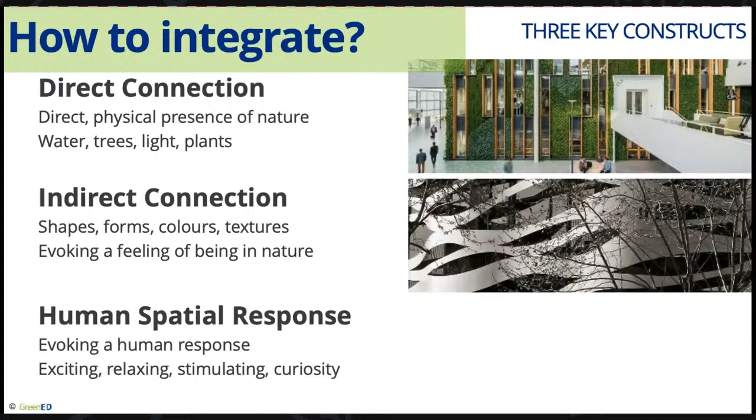And the third is human spatial response - creating spaces that evoke a human response or emotion, something that's exciting or relaxing, stimulating, or makes you curious. That's also done through the built environment and what you're designing and how you experience a space.

So some of the pioneers in biophilic design include Stephen Kellert, who was a professor of social ecology at Yale University, whose research and writings advanced the understanding of this connection between humans and the natural world, and he helped pioneer the concept of biophilic design, an emerging field that promotes health and well-being by creating connections in the built environment. The other being William Browning, who's with Terrapin Bright Green, who's been doing this work for a couple of decades as well. The good news is there are lists you can use to get here.

For Stephen Kellert's work, he breaks it down into 6 biophilic design elements, and within those elements there are further attributes with explanations for all of these - everything from facades and views and animals and plants and nature to biomorphy and biomimicry. There's a whole manifest here, it's very interesting.

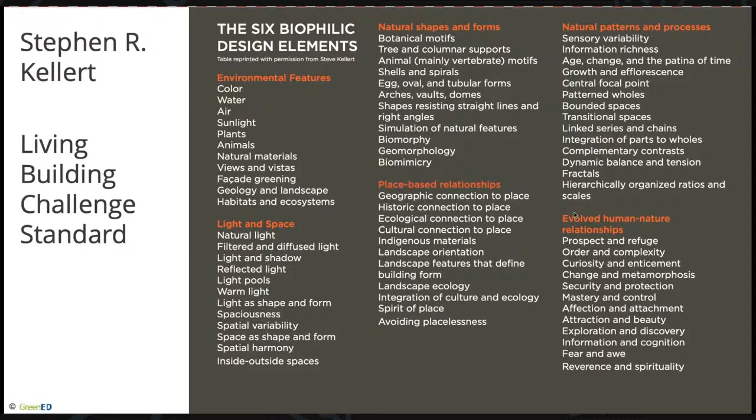And from Terrapin Bright Green, they've also broken it down into 14 patterns of biophilic design, and you can read more about these. We're also going to have a course coming up that's a more deep dive on biophilic design, so keep on our mailing list and we'll let you know.

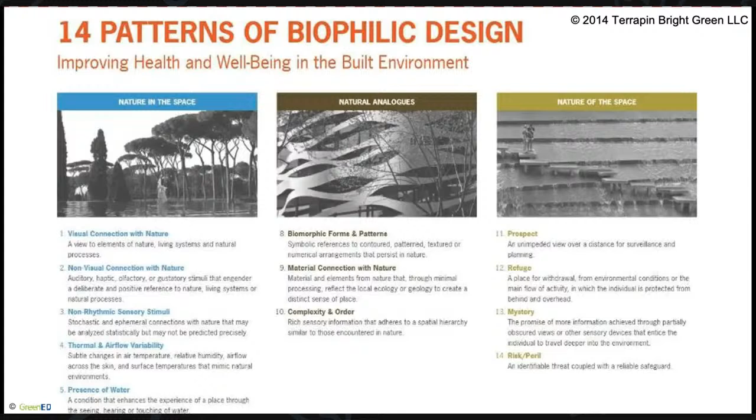So how can this be useful? If you're doing Green Building Rating tools, these 2 tools, the Living Building Challenge and the Well Building Institute, have prerequisites or preconditions, meaning you have to do it - biophilia is one of the components you have to do to get this rating.

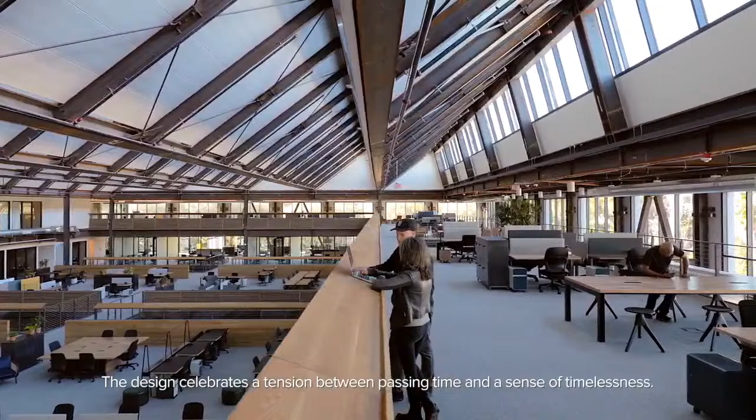Google, as an engineering culture—what we found over time, interviewing different Googlers and working with them, is they're really interested in how things are made and how things come together. So the notion of exposing and expressing not just the steel structure, but really all of the systems, became a key design criterion that fits their culture.

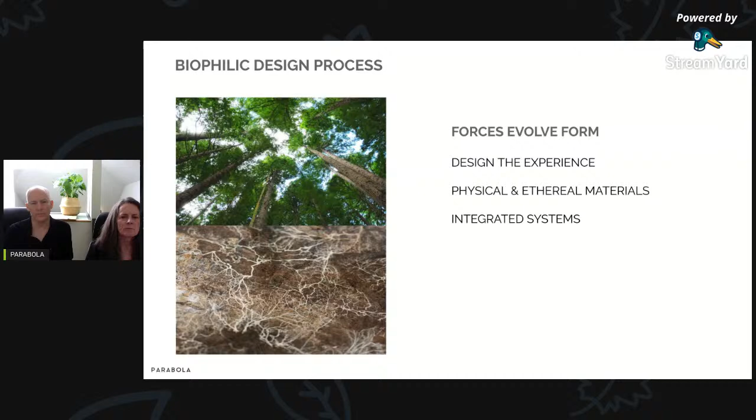That can be unpacked as designing the experience, the physical and ethereal materials included, and integrating systems. When we say design the experience, our goal is to do that as an initial choreography, and then the architecture is what gets designed to support it. That could be seen as in contrast to making a form and then placing people within it.

In unpacking the physical and ethereal materials, it's important that architecture is often seen as a physical artifact, but the ethereal materials like light, air, noise and smell, other sensorial realms, are actual materials that can be designed with. That extends into systems, and the architecture is also not drawing any lines between itself and the systems that are serving it.

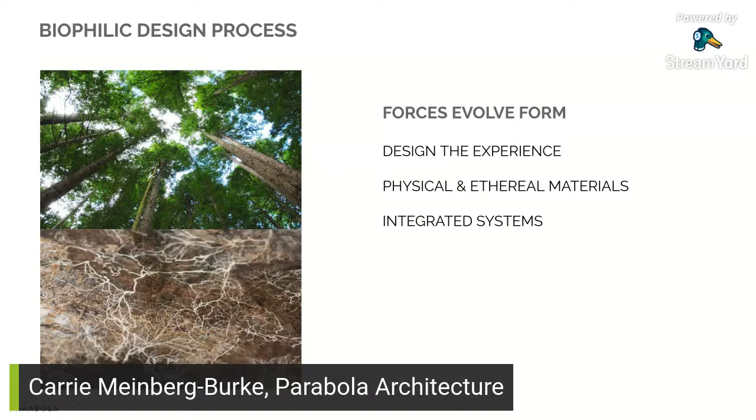We apply that kind of thinking, for example, in the design process to balancing performance and value, looking at when you reach that point where you've really optimized it before you start having loss in one area or another.

When Google came to us, one of the things they asked for was beauty and simplicity. And as we all know, simplicity is not so simple. The effort it takes in architecture, the kind of investment in the design process needed to simplify the built artifact, is something we continually strive to hone.

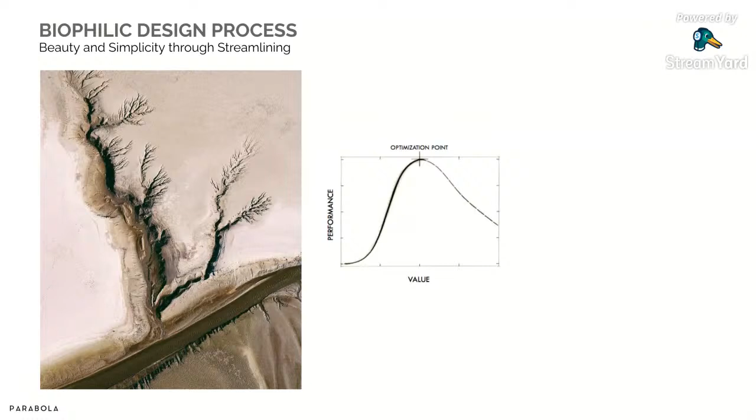As Carrie mentioned, this was a really aggressive schedule. It was 22 months from our very first sketch and very first meetings with Google to first day of business.

In the earliest days of the design, we had a chance to meet with the vice president of real estate, David Radcliffe at Google. We really wanted to understand at the most basic level what he wanted the building to do. He said, we want to solve for the things that we need to solve for in all of our buildings. We need to promote Googler focus by addressing light, air, and noise.

That really became the mantra for the project. They didn't say they wanted a biophilic building, didn't say they wanted LEED Platinum or to win awards. They were really keenly focused on this Googler well-being, but also these ephemeral things, the light, air, acoustics of the building, because those are the things that, if not working properly, cause the greatest level of distraction and complaints, and really inhibit the ability of Googlers to focus.

In terms of a biophilic design process or any integrated design process, we found it really helps to have a simple set of clear directives that you can share with the owner for a clear understanding, and bringing a builder on board and all of the trades over time, if they understand the clear objectives and where the focus is, that understanding really starts to get infused in the making of the building.

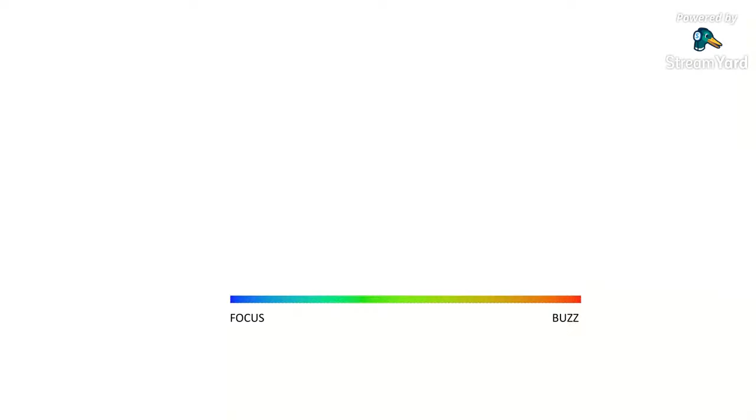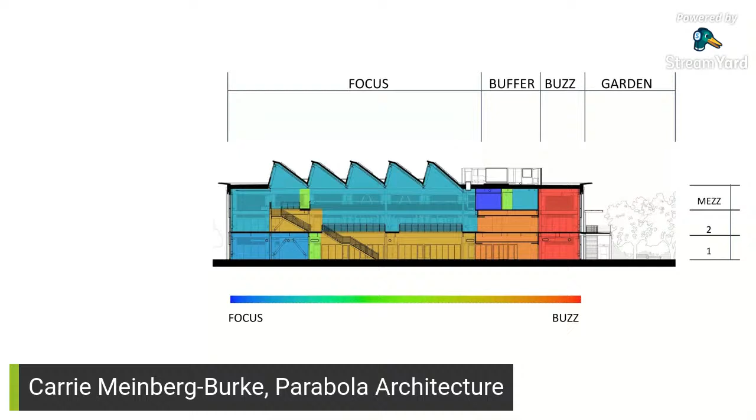When we designed the building in section, you'll see that to the south, to the right on this drawing, we put the buzz zone next to the garden. That's the area with programs like cafes and lounges where people can convene and flow through. The buffer zone has meeting spaces, bathrooms, other service spaces, and small phone rooms. That area also has a mezzanine that wraps around the building, and part of this creates a range of ceiling heights.

One of the things in biophilic design, with Prospect and Refuge, is considering sight lines, ceiling heights, and slots of space that create the perception of variety and right-sized ceiling heights for various program elements. That's very much part of the engine room of this building.

So the spectrum became a really useful tool to communicate to Google and to the potential users, but also to the trades and builders, about the nature of this building. It describes, in that colored spectrum, in some ways the daylight.

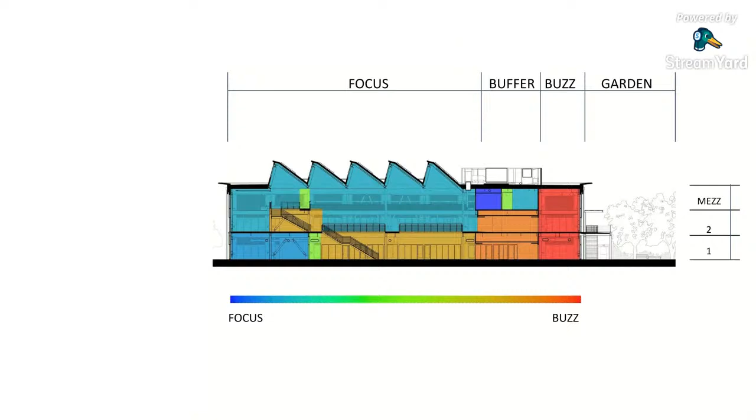To the south side in the buzz space, it's the warmer light qualities where we could allow direct beam penetration to come in, versus the cooler light to the north side in the large workspace, the focus zone, where we worked hard to eliminate direct beam.

But it could also describe a type of acoustic difference between the spaces. The buzzy space, the red portion, being buzzier, and the blue representing something akin to a library reading room, where the acoustic throttles down and becomes more absorptive. So the spectrum became both a diagnostic and a design tool, and you can see how it's represented in the plans.

One of the things in working closely with the builder, as we looked at cost issues, John Castagnoli kept reinforcing simplicity in the plan, not having a lot of different bump-outs in the plan shape.

So we really wanted a simple plan with all the complexity in the section. Often in our experience, buildings that have a lot of form drivers in the plan may not even be perceived in reality. We learned the same economic lesson on our own home, which had a very disciplined, simple plan volume that didn't necessarily relate to complexity or richness of experience.

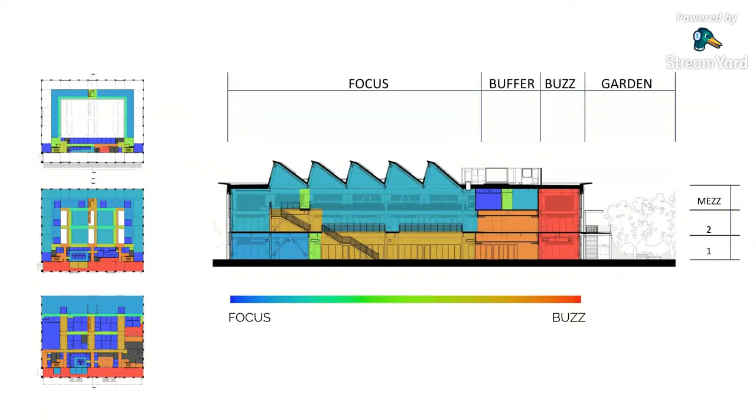That's partly why we design so much in section, because that's the perceivable aspect of design, and it's possible to infuse qualities in section that belie the simplicity of the plan. Plus, Google has a rhythm with a lot of meetings and video conferencing where they don't need a lot of light, so that's placed on the lower level below the focus space. We're taking advantage of the transitions from buzz to focus running south to north, but also vertically through the levels, with light levels and qualities needed as you move up through the building.

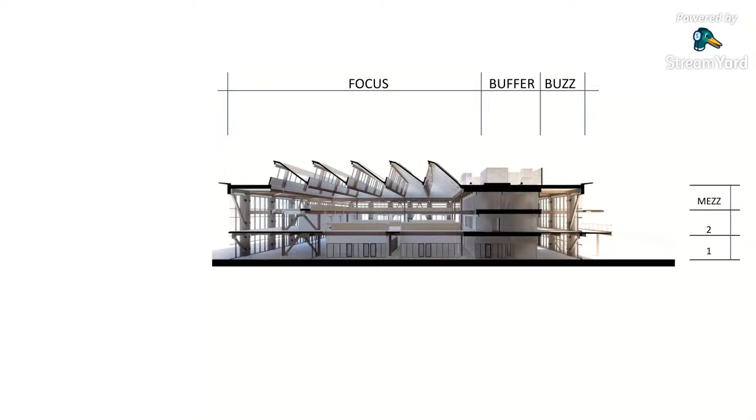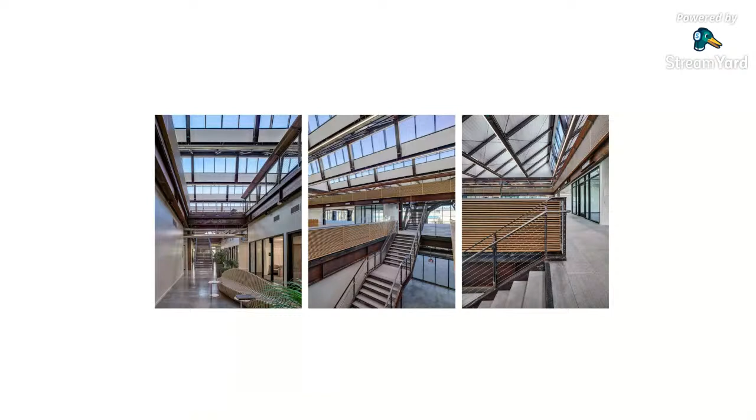There's also this idea at Google of wanting these casual collisions. The open stair and these light wells created that ability, but we also needed to solve for privacy and focus. Those acoustical railings with slats have two inches of acoustical cotton behind them. Those book ledges actually serve as both an acoustical block and a functional ledge and a privacy divider.

One of the characteristics of biophilic design, which we translated into that notion of designing the experience, is shown on the left: coming through the buffer zone from the cafe into one of these light wells, there's a moment where everybody stops, looking up to the north to the large space above, and there's just a sort of wow moment there. It ties into that innate feeling of awe that people have, and begins the sort of qualities of prospect and refuge.

There's the sense of being able to be within the lower level of an office building, but to have a view extending out to see the sky, to see clouds, to see the north light. And then making your way up, moving through this internal stair and arrival into the focus zone.

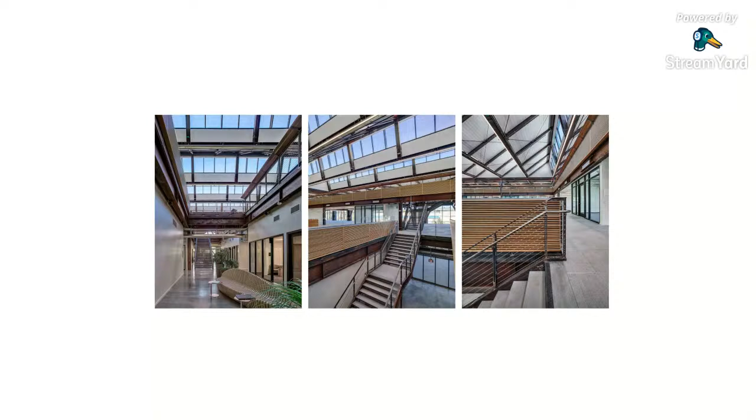We noted too that stretching your eyes from your computer to a cloud can be anywhere from 2 to 4 miles. Sorry, I don't know how to translate that into kilometers. Michelle, I'll let you do that.

There is this aspect of the focus zone that includes light and air, the comfort of air, but also if you note on the upper left, you'll see little patterns in the ceiling. That's all acoustical metal decking, so the acoustical treatment is baked into the core and shell of this building, including those railings.

In collaborating and working intensely with our engineer consultants, we had initially designed this large space with columns, and working with our structural engineer early on, he said, well, do you really want those columns? Because we can design these trusses and allow for column-free space. So we were able to design the five Vierendeel trusses that span 140 feet, eliminating the number of columns and providing ultimate flexibility within this workspace.

You can see the wraparound mezzanine, the wood panels that wrap around the mezzanine surrounding this central space. That's showing you the book ledge, which they use quite a bit. You see people with their laptops there, and they've got a lot of displays of books and other information.

The COTE jurists noted, in relationship to this view in particular, that they were impressed with this large interior space that had the qualities of being outside, and that really impressed them. When you're there, because it doesn't have direct beam light and you get views of the sky, you really sense the changing light levels in the day, from the morning light to the east, and as the sun is directly to the south, the light levels sort of dim until the late afternoon, when they pick up again with warmer western light.

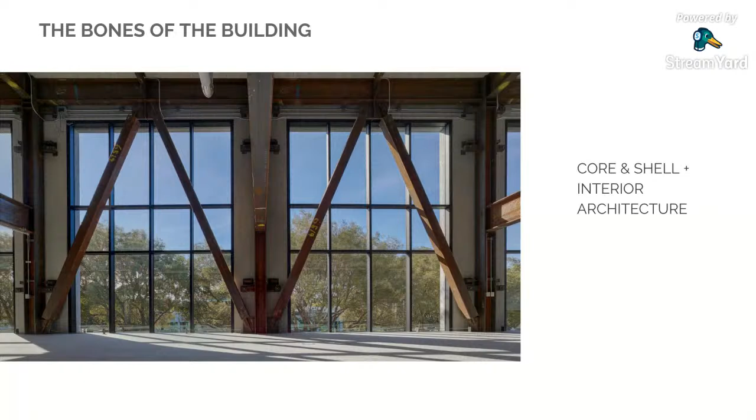And all of this is, again, very much at the detail scale of design. Light, air, and noise allowed us to make space for these important systems like the acoustical metal decking, or also for performance, to really reach the level of sustainability, the LEED Platinum level, and energy consumption.

It all has integrated insulation in these sandwich panels, which also ended up having a very quick construction schedule, as they just had to bring these prefabricated panels and erect them onto the steel in a really quick sequence.

But then that board form becomes the interior finish. In terms of the patterning, it's subtle, but as you get closer to it, you see the quite beautiful imprint of the wood in the board form. So instead of being a drywall finish, it's all this kind of integral material.

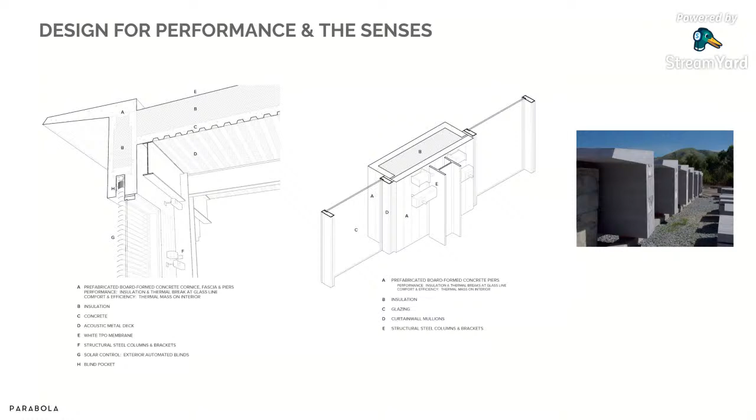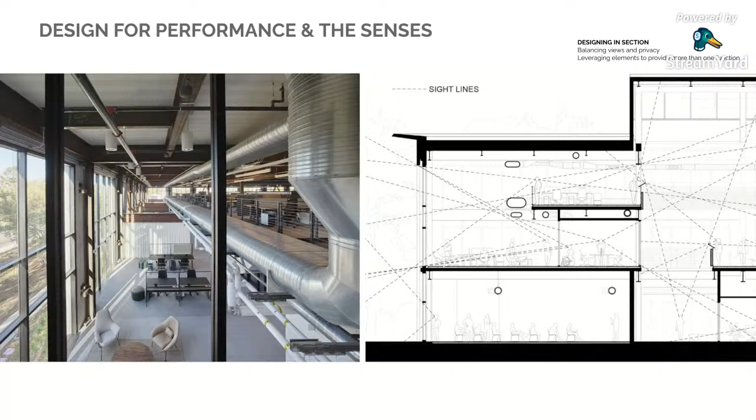So this is showing the detailing of the acoustic railing, again unpacking what is creating the performance as well as the beauty.

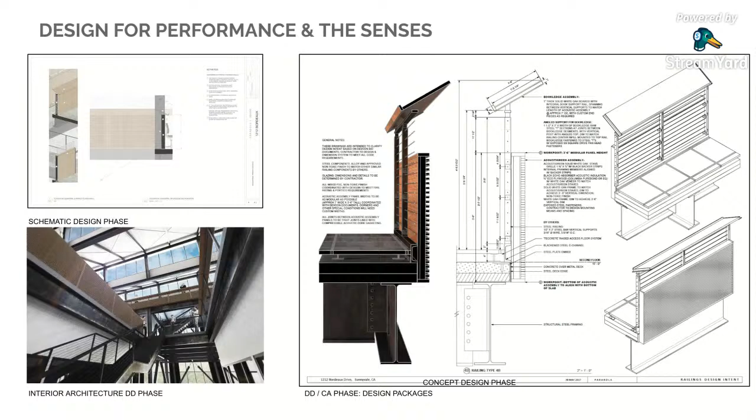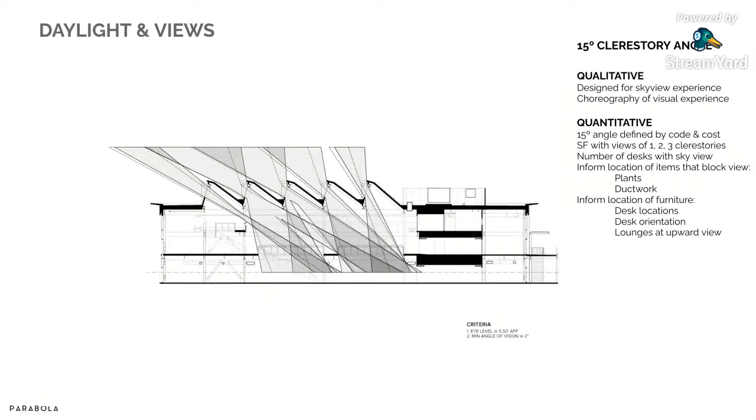We do a lot of work to calibrate the location of sight lines and daylight. This is showing how we realized that by slightly tilting the clerestories, that 15 degrees is what allows them to be windows and not skylights, from both a cost and complexity standpoint. But that also provided measurably more sky views.

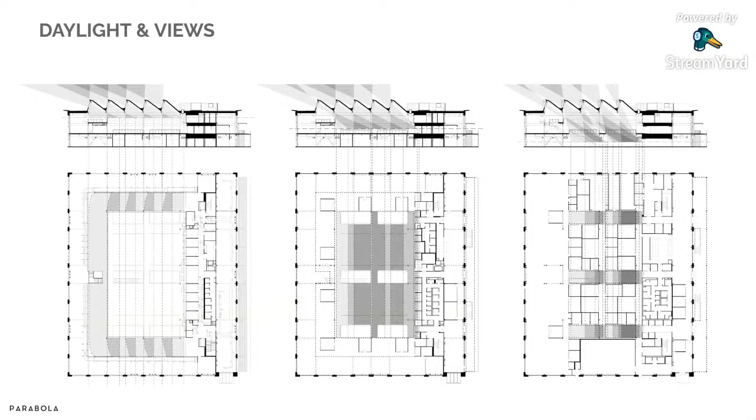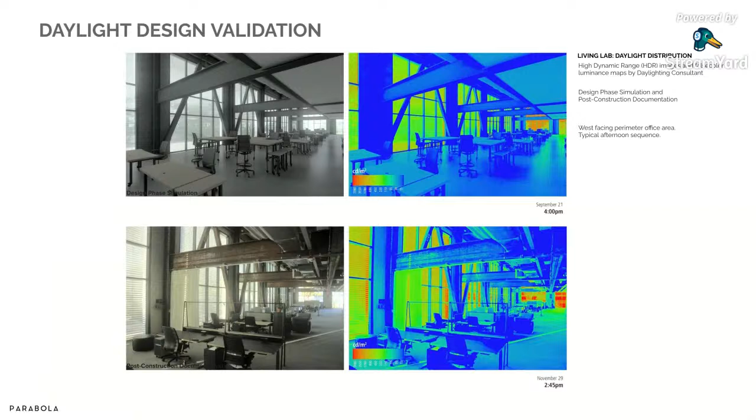When you hone in on these things, it starts to really inform the user experience. We worked closely with our engineers to tune the daylighting, and what's remarkable is how closely the model matched the actual as-built false color photos. Much of that benefit comes from the exterior shades, which in the States are still not that common of an element, but allowed us to streamline the perimeter envelope and get great performance that responded to changing light levels and the daily circadian rhythms of sunlight.

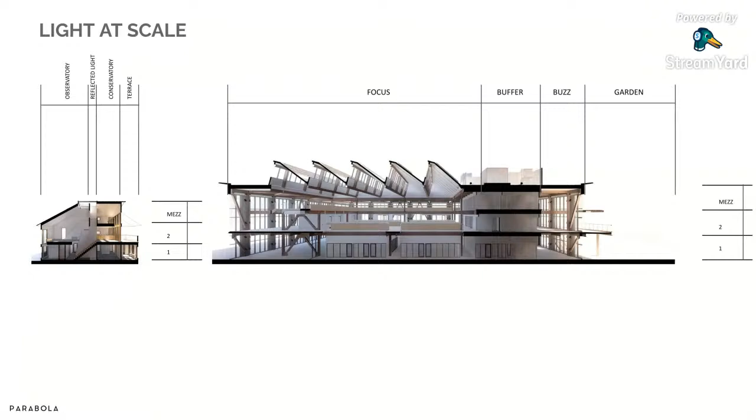Since light, at the scale of humans on Earth, is almost a scaleless material, you can see 1212 on the right. It has a very similar diagram to our house timepiece, which we built in 1999, based on some theoretical work I was doing in grad school about shaping form with light, inspired by Ptolemy's quadrant. The zones of light that 1212 focuses on are very similar in our home studio, where we have a program defined by locations within light and also sectional thermal stacking.

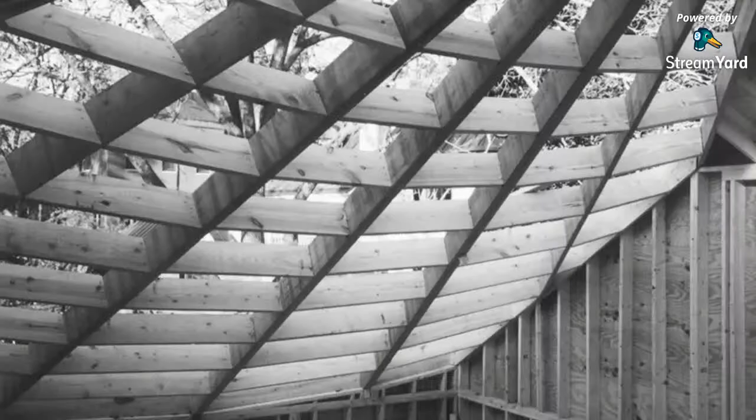Our house, where our studio is, has a roof form defined by the movement of the sun through an oculus at the winter solstice. You can see more of this on our website. Essentially, the slope and skew of these structural beams, these radial beams, matches the altitude and azimuth of the sun—nature shaping form in ways that we feel resonate with humans. When you look at that form, it has a universal beauty to it; it's not a willfully drawn or constructed form, it's a mapping of natural forces.

This is the level of experience we feel has infused our practice and architecture with an awareness of this movement—the constancy of light, but also the change. At our latitude, the Earth is spinning at 788 miles per hour, and that's very noticeable with the movement of a beam of light across the floor or wall. That's what that represents.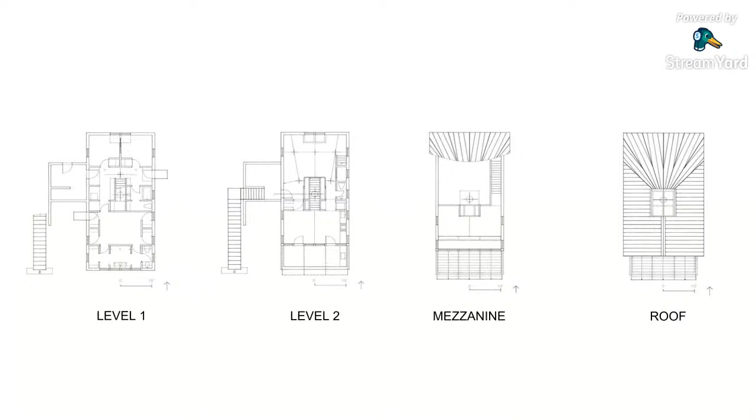So like 1212, our house, because we were on a limited budget as well, has a kind of simplicity in the plan. It's almost like designing a vessel or a boat, where everything that we bring onto the site needs to be purposeful and essential.

Zooming back out in terms of the urbanism of it, it's downtown in Charlottesville, but Kevin had this vision before we bought the lot of what if someone built in the back more like a barn or a carriage house relative to these three big Victorian era houses. And that set into motion this collaborative joint venture with the neighbor, buying and redividing the lot.

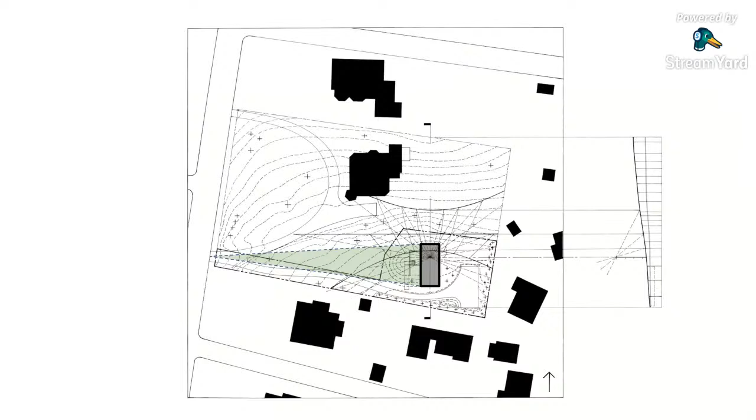Our house is really hidden in plain sight, but it's like being in a tree house because it's surrounded by nature and set back from a busy street. So it has this overlay, certainly the biophilic qualities of being in this house, and it's been an amazing place to be during the lockdown, but also the overlay of fitting and being responsive to the local culture and the history of Charlottesville.

So these are things we applied to the work that we're doing and have developed in some ways both an innate understanding of the movement of light, but also the curiosity to understand each site in more depth before we begin to generate architectural responses.

So that's our presentation, and we'd love, if there's time, to answer any questions or have a conversation.

Oh, I just moved back, okay, I see the questions now. The water, okay, are you talking about for 1212, that question?

Yeah, I think so. I had mentioned it's qualifying for LEED Platinum, so I imagine all that was considered. Oh yes, it was, at that point. There's some gray water reuse. There's a full filtration area for flushing toilets, so it's using that. There's also municipal recycled water coming to the building for those purposes. We have photovoltaics on the roof, which is a whole other thing we could show you, but that's all there as well. They are actually moving toward net zero, they're going to add more photovoltaics to the project because it's very close to net zero.